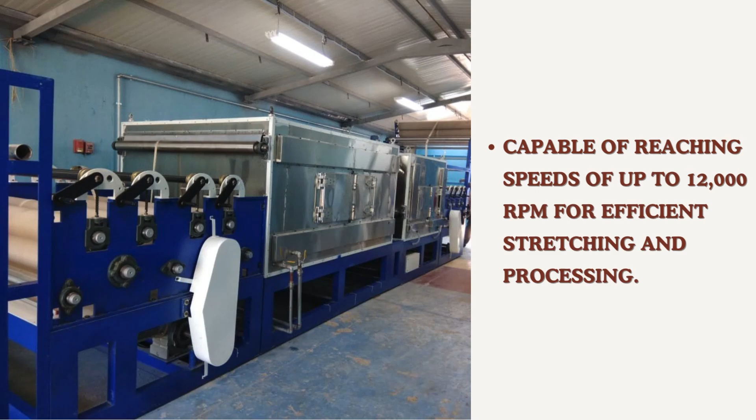Let's explore its features. The product specifications are fully automatic operation for seamless performance, specifically designed for fishnet stretching applications, capable of reaching speeds of up to 12,000 rpm for efficient stretching and processing.

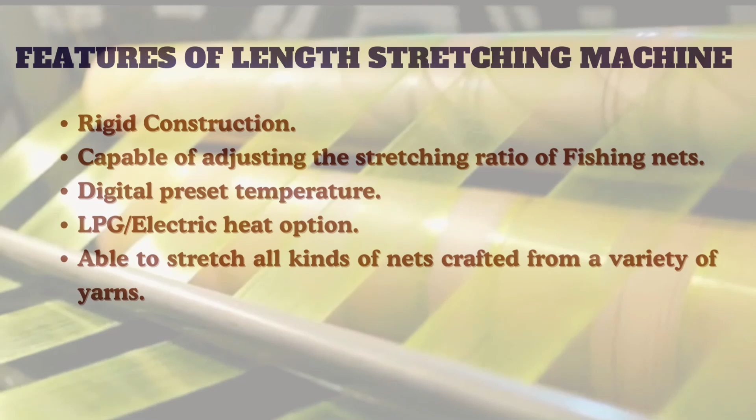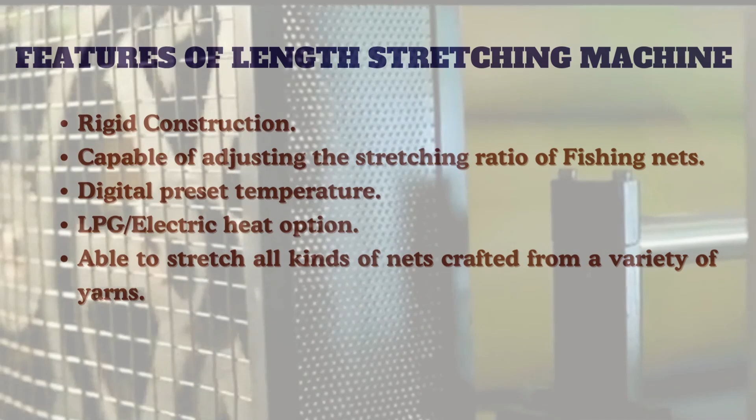Let's look at the features that make this machine stand out. Rigid construction, capable of adjusting the stretching ratio of fishing nets. Digital preset temperature, LPG electric heat option. Able to stretch all kinds of nets crafted from a variety of yarns.

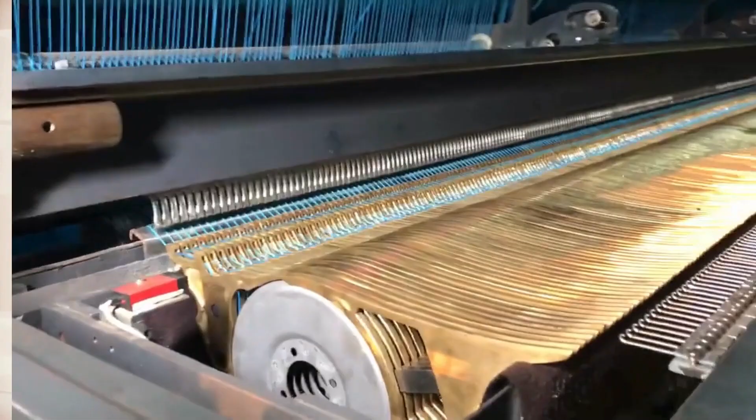Let's take a look at the double knot fishing net machines, also known as the HY3 fishing net machine. Specifications: double knot to single knot conversion easy. Mesh forwarding by self-lubricated cam clutch. Warp supply by self-lubricated cam clutch. Knot tightening by adjustable cams to suit different types of yarns.

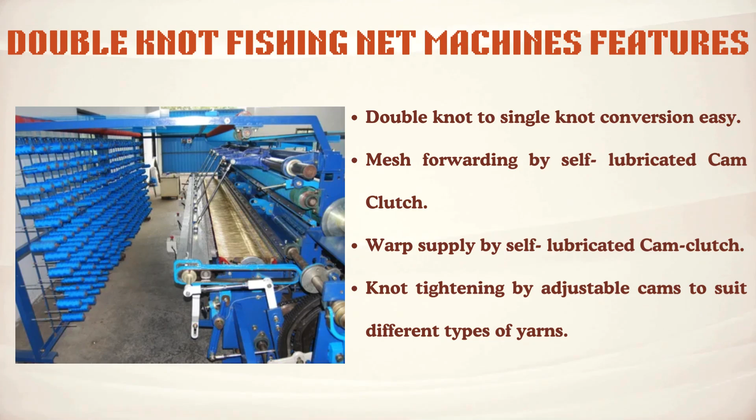Features are machine made of strong steel for knotting thick nylon, polyester, PE, and nets. Heat-treated cams with precision grooves.

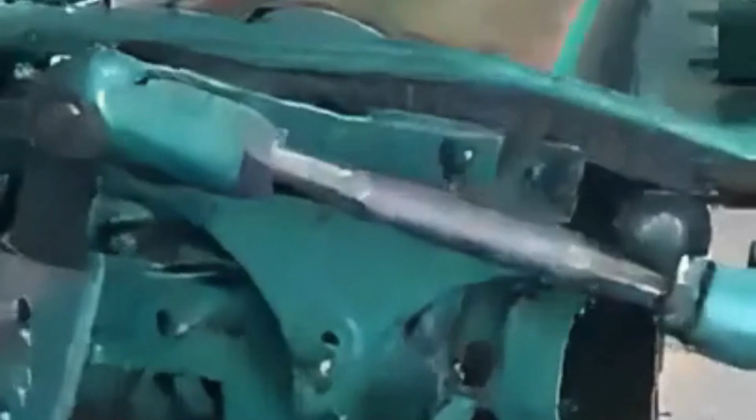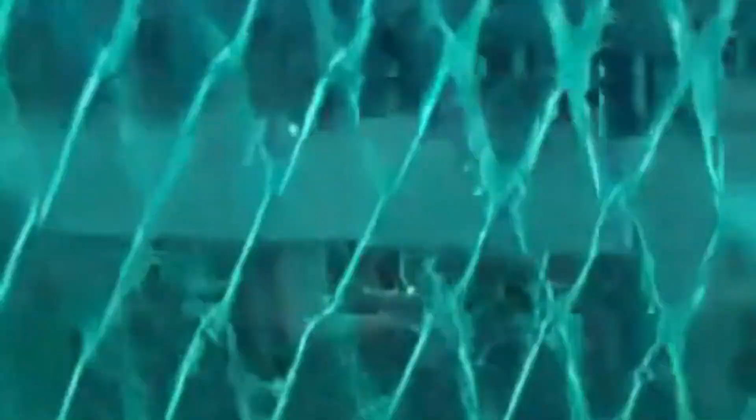Let's know about fishing net making machine. Model Harpoon.

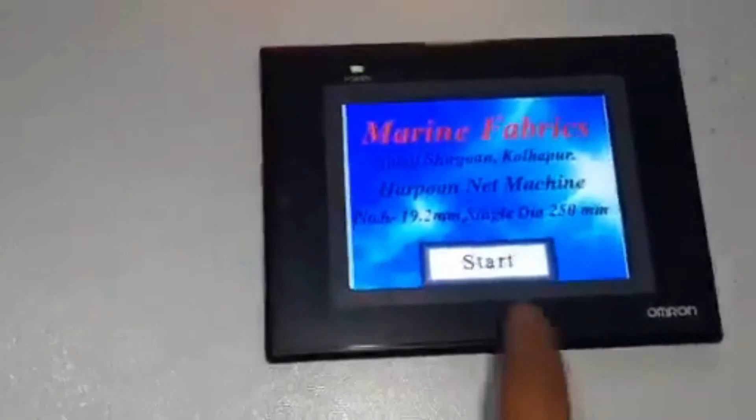These are the features: machine made of strong steel for knotting thick nylon, polyester, PE, and nets. Heat-treated cams with precision grooves. Big rollers for stable twine supply and knotting.

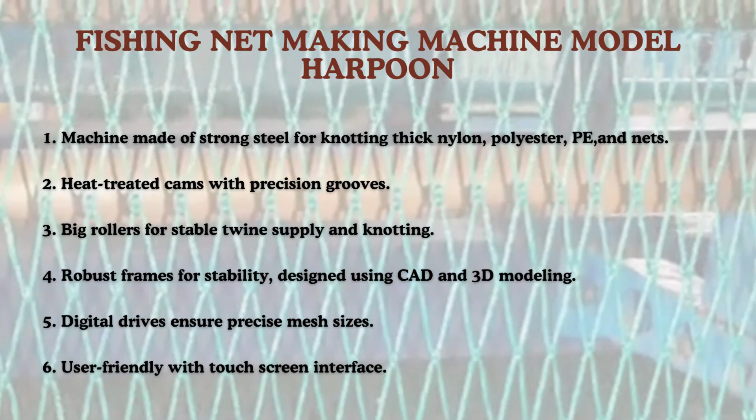Robust frames for stability, designed using CAD and 3D modeling. Digital drives ensure precise mesh sizes. User-friendly with touch screen interface.

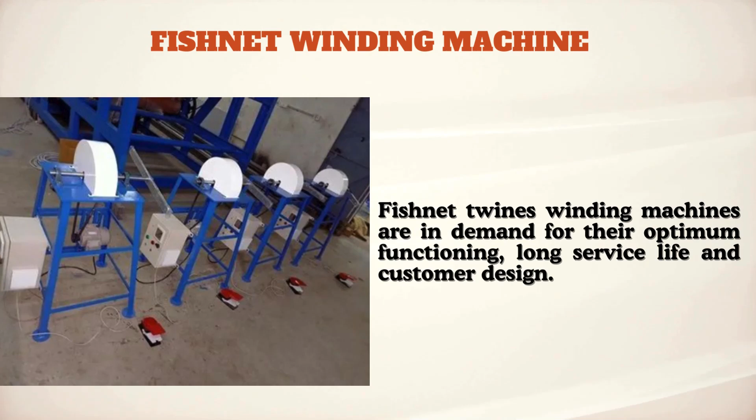Introducing the fishnet winding machine. Product specifications: fishnet twines winding machines are in demand for their optimum functioning, long service life, and custom design.

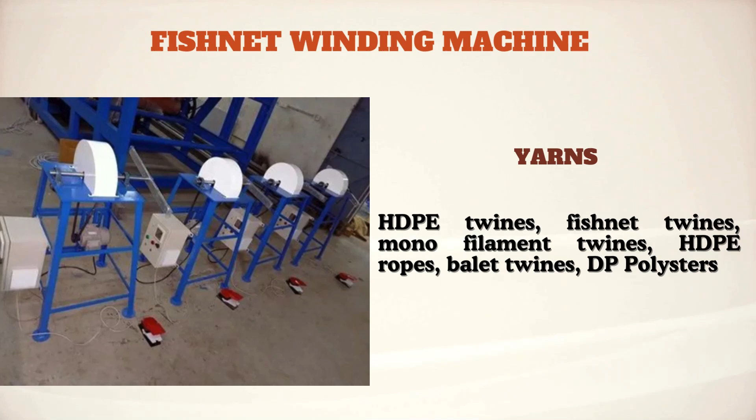Model Ultima. Number of spindles: 6 per section, single-sided. Speed up to 300 meters per minute. Yarns: this machine is capable of handling various yarns, including HDPE twines, fishnet twines, monofilament twines, HDPE ropes, baler twines, and DP polyesters. Power: 0.25 horsepower per spindle. Dimensions: 8 feet by 3 feet by 6 feet.

Now let's take a look at the bobbin winder for fishing net machine. Product features: bobbin winders are used for winding bobbins and spools. Each spindle is powered by an independent FHP motor for winding monofilament, PE, polyethylene, and multifilament with equal tension onto the bobbins.

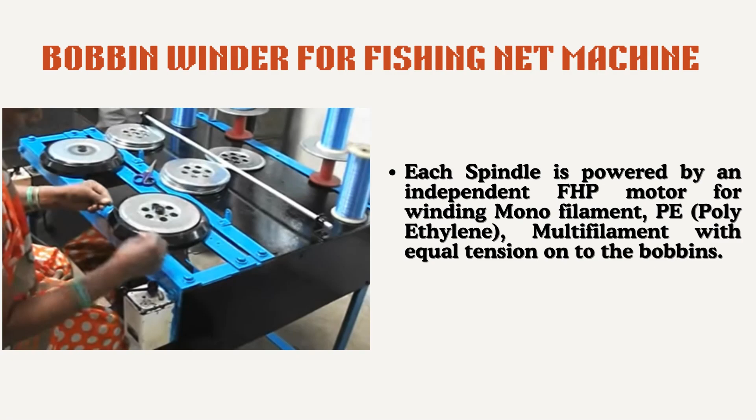This results in the net machine running uninterruptedly, with the weft drawn out easily, ensuring a perfect weft feed.